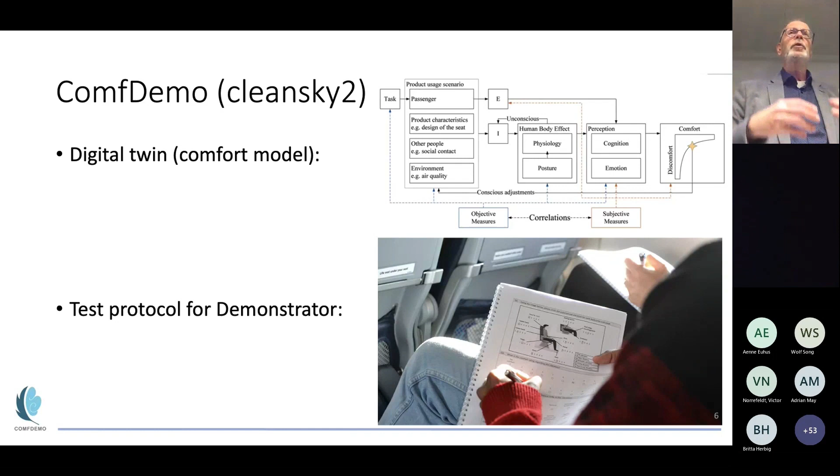Now I continue with the results we've shown in the literature and that we measured ourselves. My presentation is on aircraft interior priorities based on passengers' opinions. In this case, it's really based on what passengers say themselves, not what we measured—later presentations cover studies on what we measured. This ComfDemo project had two important parts: making a digital twin of human comfort, and the test protocol for a demonstrator. In Clean Sky, demonstrators will be made of future aircraft to test already what's happening in the future aircraft.

It's about passengers' opinion. In this case, we asked people to complete questionnaires in the aircraft while flying. If you look at a study in the literature by Bouwens on the most important factors for comfort in jet airplanes, you see that seat anthropometrics—how you fit in the seat—is the most important factor, and noise is number two.

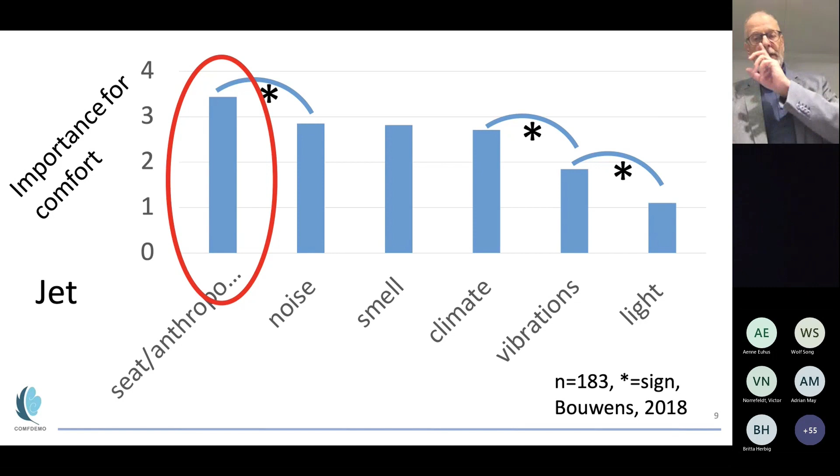Smell, climate, and vibrations after that. But we did also a real test in a turboprop flight on November the 3rd. It was a flight of 70 minutes, two times, with passengers.

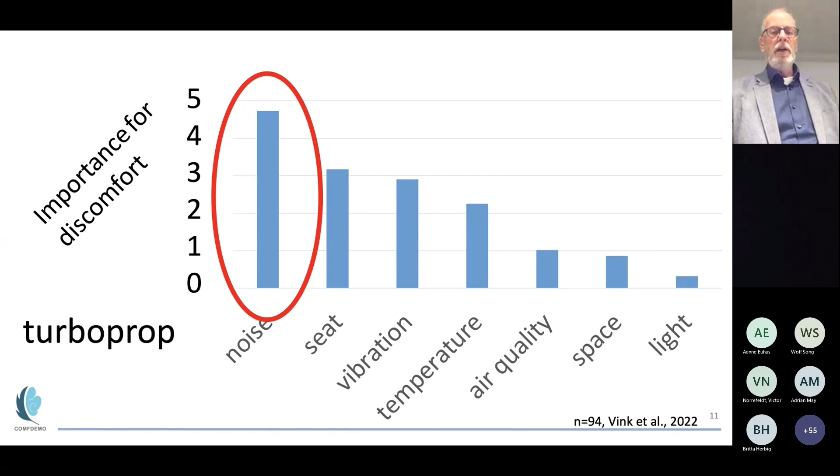So for future airplanes, it's important to take that noise into account and reduce it. I think it's important in the demonstrator to test how we can have turboprop aircraft with less noise.

If you look at the seat itself, what has priority in the seat? Nijholt did a large study where people sitting in an aircraft seat were asked. Number 1, which was mentioned, is legroom. I don't think that's a big surprise to you. Number 2 is the cushion, the hardness of the cushion. Number 3 is the lumbar support. Number 4 is the seat width.

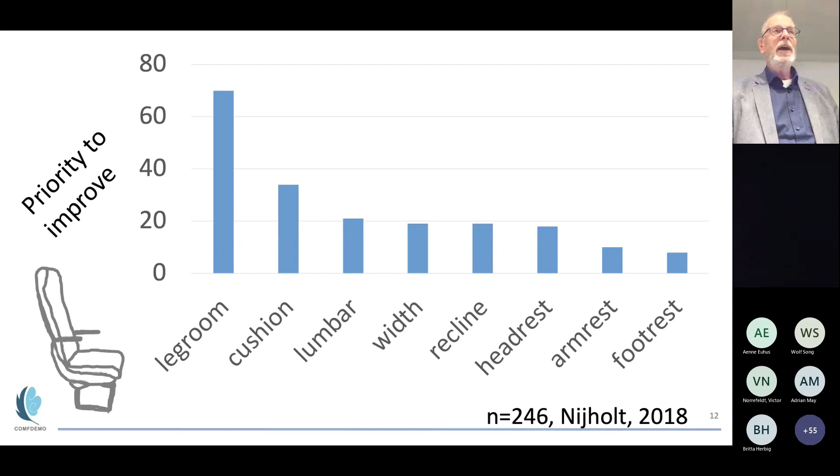Number 5 is recline. By the way, it's interesting that many people like the recline, but the persons sitting behind them don't like it. And then you have the headrest, the armrest, and the footrest.

There's also a nice study done by Anjani, and she compared changing the seat pitch, so seats a little wider apart, with changing the width, so a wider seat. What is the effect on comfort?

Many studies show hip width is influencing the seat width. But if you have an 18-inch wide seat, which you see on top of the slide, and you compare that with the hip breadth, well at 95%, the P95, they all fit in there. But if you look at the shoulder width, the males don't fit in there. And if you look at the elbow width, the P95 female and P95 male don't fit in there as well. So maybe it's more important to look at the elbow width if you want to create comfort than at the hip breadth.

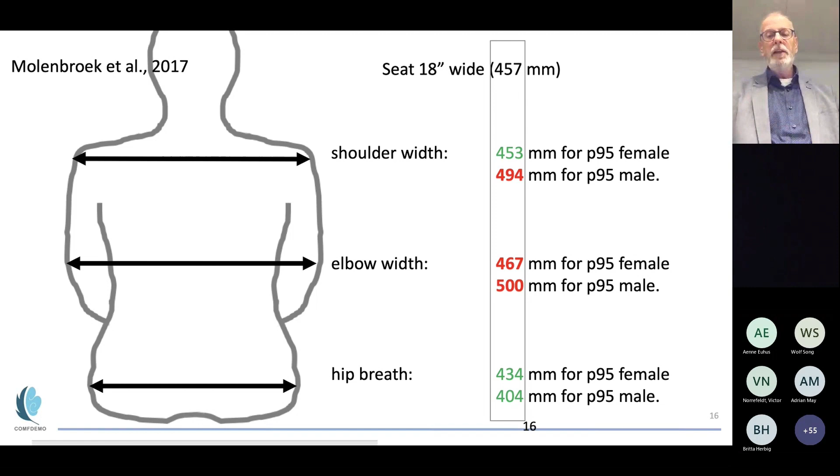So in summary, I shared with you that propeller aircraft have potential. That was already mentioned by Victor. They are more sustainable because they have less fuel consumption and so less CO2 they produce.

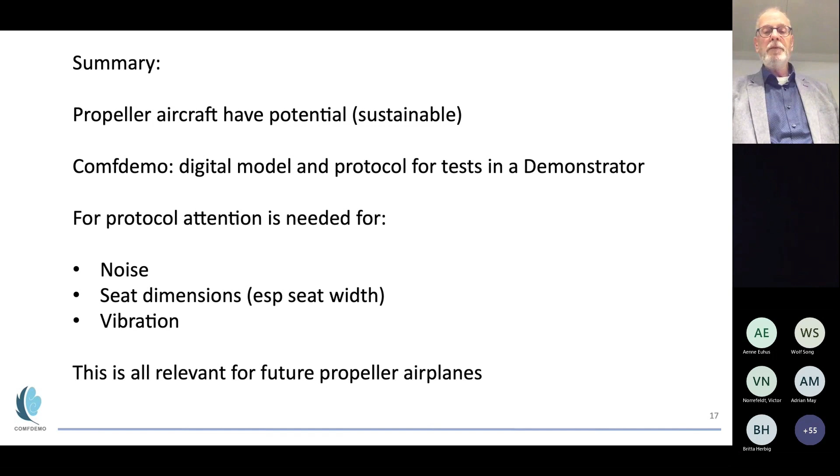And in ComfDemo, we make a digital model and a protocol for the test. And for the protocol, attention is needed for noise, seat dimensions, and vibration. This is relevant for future propeller airplanes.

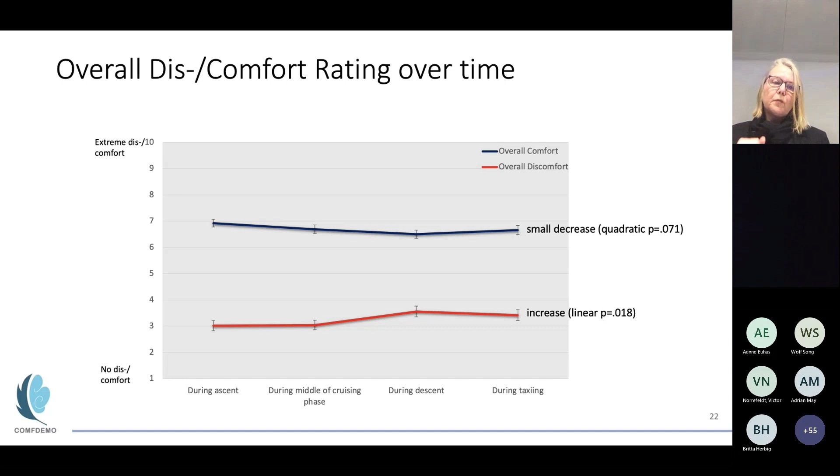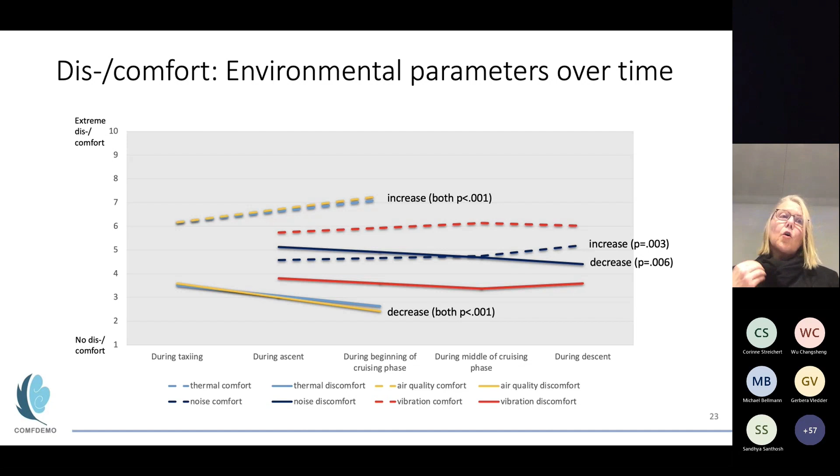In more detail, if you look at different environmental parameters, the ratings are really on the average, as for comfort as well as for discomfort. Participants have a decreasing noise discomfort rating over time and an increasing comfort rating over time, but it's still rather in the middle.

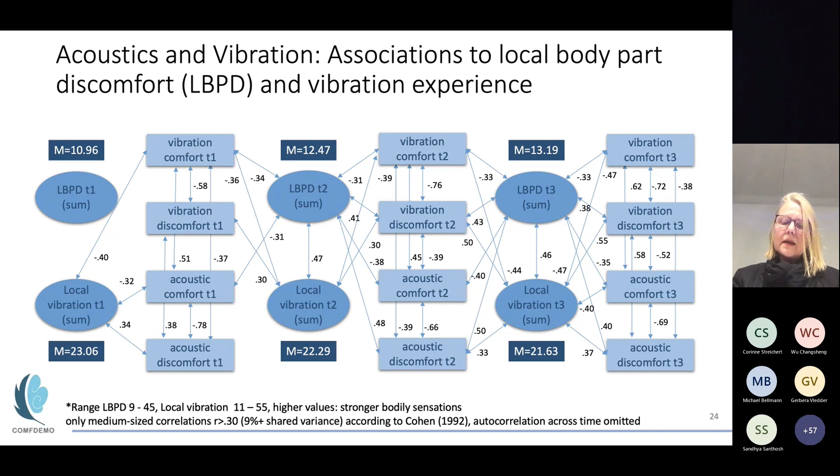This is going to influence the vibration comfort and discomfort, and the acoustic comfort and discomfort. Over time the associations are getting stronger, and this is even cumulative to the last measurement during descent. What's interesting is that we see this on a very low level. People didn't experience much local body part discomfort or local vibration, but it still has a rather increasing and cumulative effect on the comfort and vibration situation.

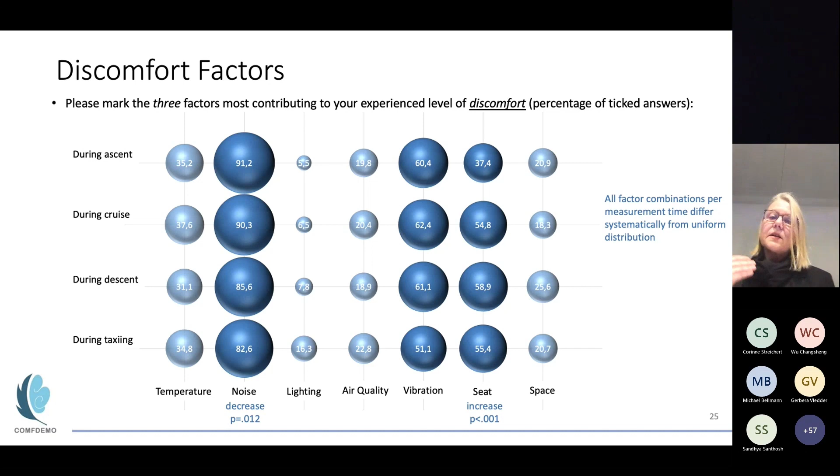This was already shown by Peter. These are the important factors people had to report over time: noise, vibration, and seat are the most important across all measurement times. Noise decreases in importance for discomfort, whereas seat increases as an important factor for discomfort.

If we do a cluster analysis, we see three clusters of important factors for discomfort. One cluster says noise, vibration, and seat are the most important thing. The second biggest cluster is temperature and noise as the most important thing, and temperature and seat is a smaller cluster.

What's interesting is that people with higher experience in flying, regardless of turboprop or jet aircraft, report more of the second cluster - noise, vibration, and seat as discomfort - than people with temperature and noise as a cluster. So there is an experience factor, and also a noise sensitivity factor: people in the temperature and noise cluster are less sensitive than those in the noise, vibration, and seat cluster.

Last result, which I think is rather important: we asked at the very end of the flight, would you fly again with a turboprop? 80 people said yes - a very high number of people - but we have 11 who said no.

These differ systematically across several things. The most important you can see here is the acoustic environment, but even more so and more reliably, it's the vibration they experienced during the flight. That's much higher for the people who say they won't fly again with this aircraft type, and they report a lot more local vibration on their body. So we have this vibration part as important. All other aspects didn't play a role in the decision to fly again.

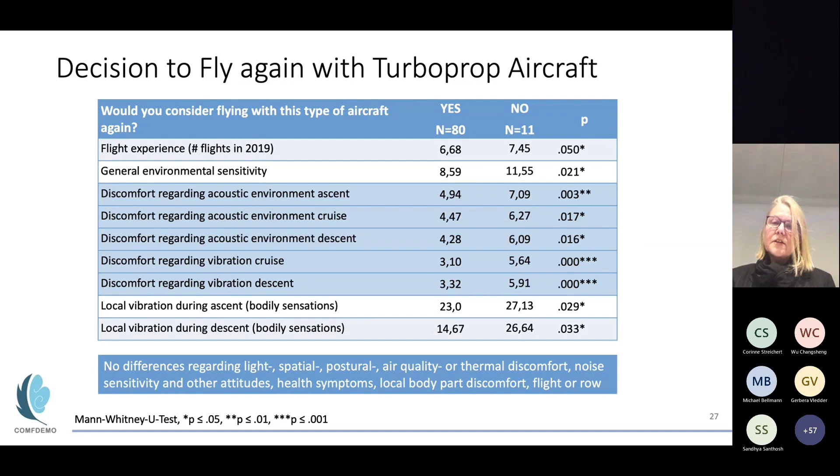To sum up, most people felt rather comfortable, the data are really good, and a lot of people would fly again. Noise, vibration, and seat are the most dominant discomfort factors. They are also the ones discriminating between participants who would fly again with turboprop and who would not. The development of comfort and discomfort experience over bodily sensation seems to be rather complex, and that is definitely a problem and a challenge for the modeling we will do in ComfDemo, and did already in ComfDemo. My colleague is going to tell you more about that.

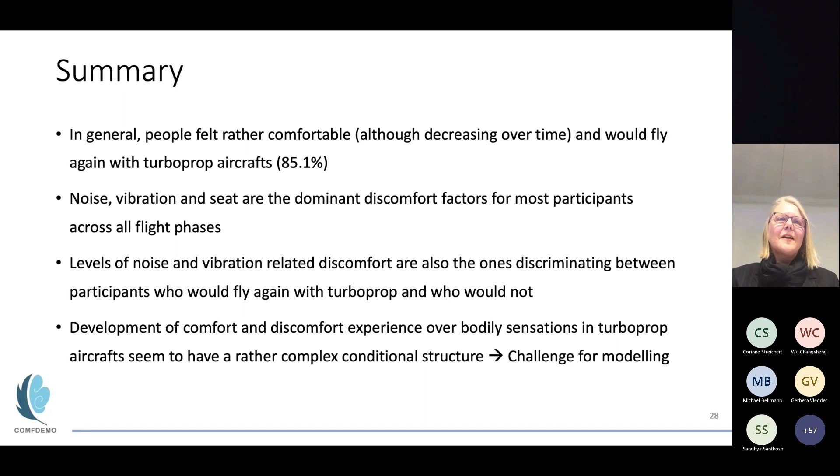Hello everyone, my name is Wolf Song, and I will give a short presentation on the digital twin of comfort. That's our first attempt at modeling passengers' comfort experience.

Just before me, two professors talked about subjective views of passengers towards different factors of comfort, and the construct of comfort is rather complicated. Like Professor Neil Mansfield said, a product itself can never be comfortable - actually the user decides if it's comfortable or leads to discomfort by using the product, even over time. That means comfort is personal, depending on our background, and comfort is multifactorial. Not necessarily one factor alone determines extreme comfort.

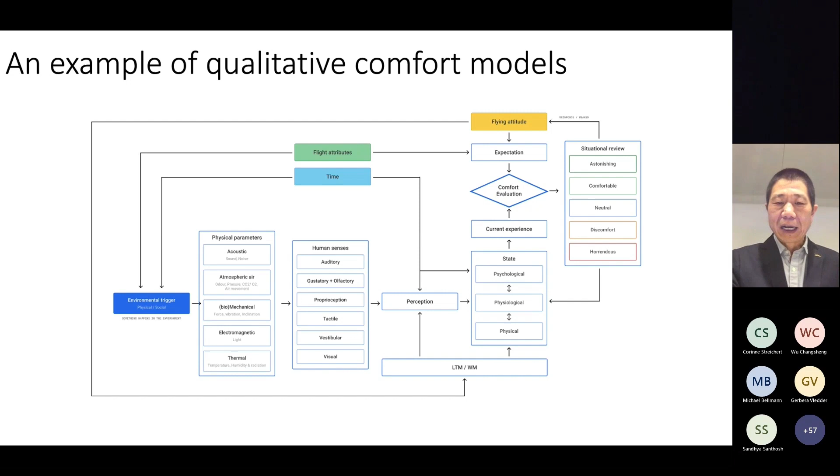So to try to model comfort, we try to identify different factors. Here I show you our exploration of different factors - not necessarily going into all the details due to time limitations. I'll quickly summarize those factors as local environmental factors, for instance noise in the cabin.

Micro environment, for instance, who I sit close to, and product characteristics and interaction between human and product. And the human himself, is he a positive person or negative person, and his flying experience. And most important, in between I put a clock, and how about comfort over time? Can we make a model and link these objective factors towards humans' subjective feeling? That's what I want to explore in these 10 minutes.

We try to highlight measurable factors, approximately 32 of them. I categorize them as time, local environment, micro environment, human, and product. We see details: noise, CO2 level, humidity, temperature, light intensity, flying time, and which row you are sitting, which seat, window seat or aisle seat, or the flight schedule time, whether morning is more pleasant or afternoon is more pleasant.

Regarding human factors, we see humans have a little bit of static factors regarding a flight, for instance gender, age - you can't change your age within a flight - and the stature, how high you are, body mass, popliteal height, buttock-popliteal depth, and hip width. Also, in between, I put a small cartoon, and we try to record humans' left-right shoulder movement and left-right waist movement. We see if we can record these 32 parameters and make correlations with the subjective feeling.

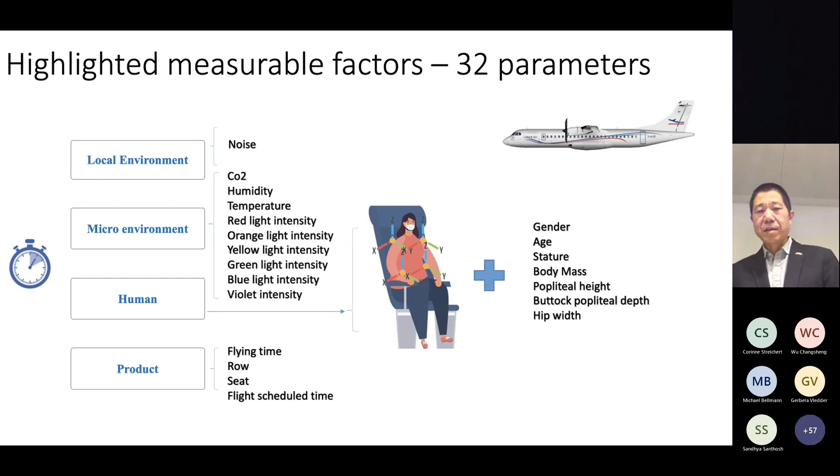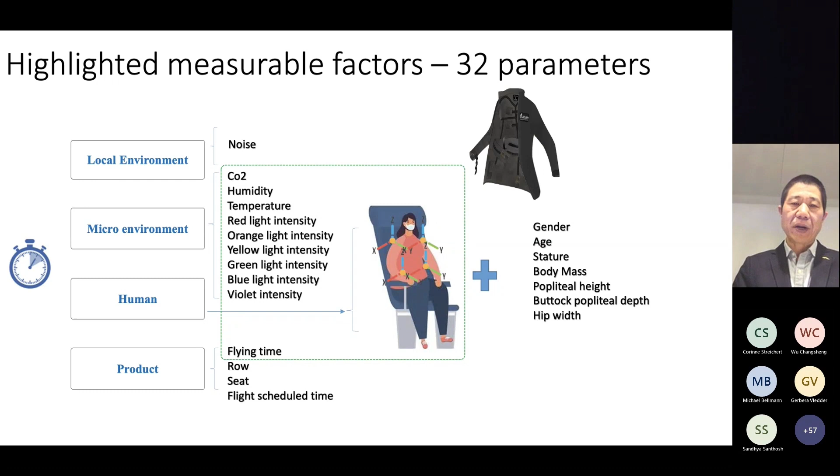For this, we developed a measurement tool named Jacket. It's able to record the parameters now shown on screen within the green rectangle. In detail, this Jacket is a comfortable wearable. Inside, we put embedded systems which are able to record the parameters we just measured - different movements, CO2, light, temperature, and humidity. On the left side, one of my PhD students is wearing one of these jackets.

In total, we produced 20 of these jackets. For this, we also selected a representative population. The mean age of these 40 people - we have 2 flights, morning 20, afternoon 20 - the mean age is approximately 35, a little bit young. The stature average is 174.

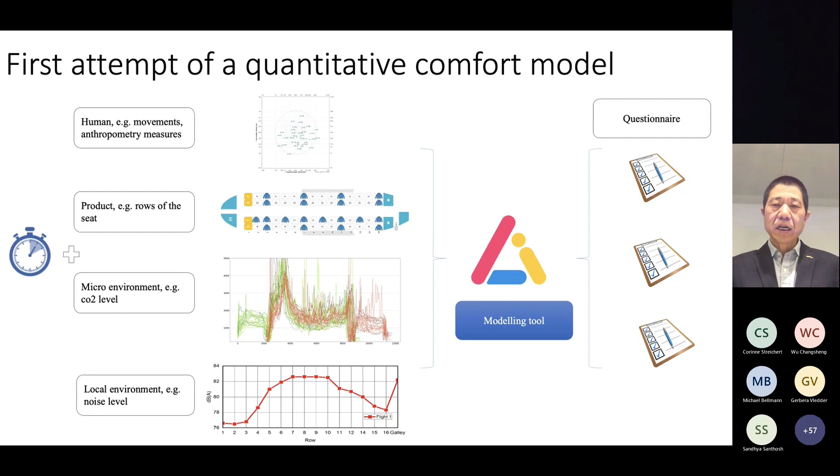On the right is the questionnaire, the answers of users' subjective feeling, and we are trying different modeling tools to link the objective data with the questionnaires. In our modeling, we take some hypotheses and we pre-processed our data. Here I just report our first attempt: we try to model the changes of comfort and discomfort as the baseline differs per person.

For instance, if I'm a negative guy, I always say comfort is 0, discomfort is 10 all the time. And maybe a positive lady will say comfort is always 8, 9, and discomfort is always 2 or 3. At this moment, we try to suppress this effect by modeling changes of comfort and discomfort.

We took 60 seconds as the basic time unit, and we also augment or increase the amount of our data a little bit by linearly interpolating the comfort discomfort scores during this 70 minute flight, because we can't ask users to report every minute of their comfort and discomfort scores.

Finally, it's data processing. We normalize all the data between 0 and 1, minimum is 0 and maximum is 1, to make the average weight of different parameters equal.

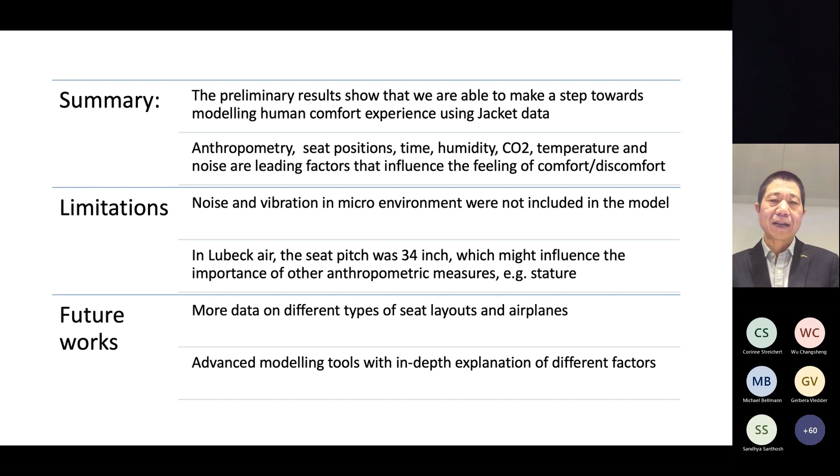In the future we will try to collect more data on different types of seat layouts and airplanes, and try to use different modeling tools with in-depth explanation of different factors. So thank you very much.

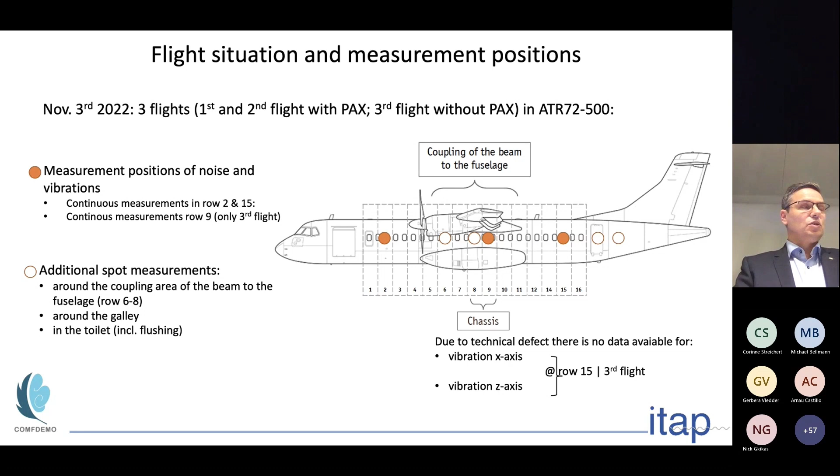And we have the possibility during the 3rd flight to make some additional spot measurements regarding noise and vibration, not only for sitting passengers, but also for flight attendants in the galley and toilet, and so on. So we do not have data from only one sensor, everything was fine and well recorded. I just want to say thanks to Lübeck Air, who supported us by undertaking this experiment.

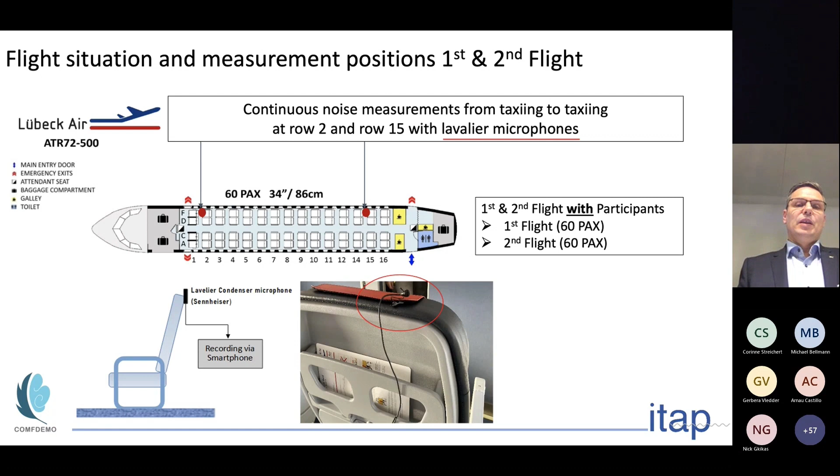So for the first 2 flights, we measured continuously from taxiing to taxiing with microphones in a sitting position at seat row number 2 and 15. We have 60 passengers included in both flights, and you could see here, it is at the height of a sitting person.

For the 3rd flight, we were also able to add more measurements, but there was a restriction. It was due to safety that additional measurements were not allowed in the first 2 flights. That's the reason why we have this flight without passengers.

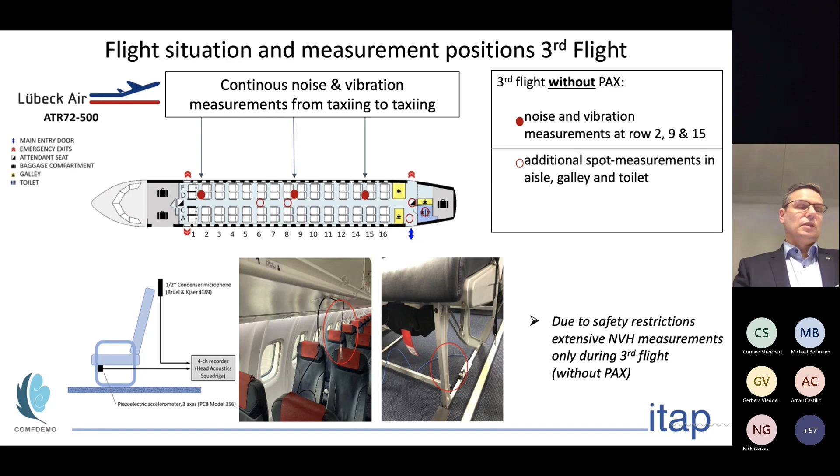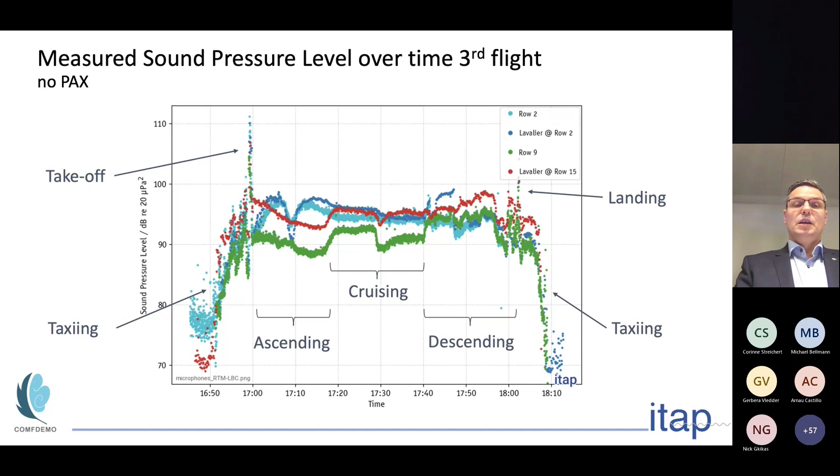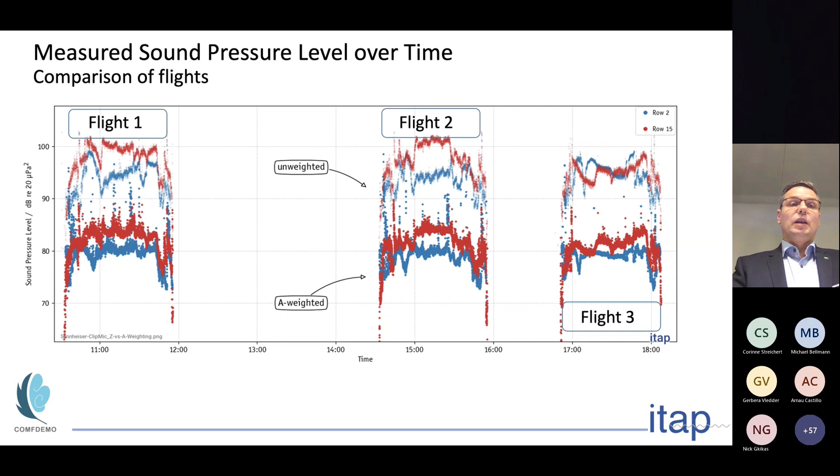You could also see that for the third flight, where we do not have any passengers inside, the temporal shape of these recordings is significantly different for the unweighted SPL, but for the A-weighted SPL it's very comparable. So what we found is that for the unweighted SPL, we found similar levels in the first flight with passengers, and during cruising we see higher levels for row number 15, which is in the back, compared to row number 2.

And we see that in flight number 3, we have similar SPL in row number 2 and 15, so it might be that the influencing factor is whether passengers are inside or not. For the A-weighted sound pressure level, we identified slightly reduced level differences between row number 2 and 15, in the back and the front, and we also see that row number 15 had lower levels during the third flight.

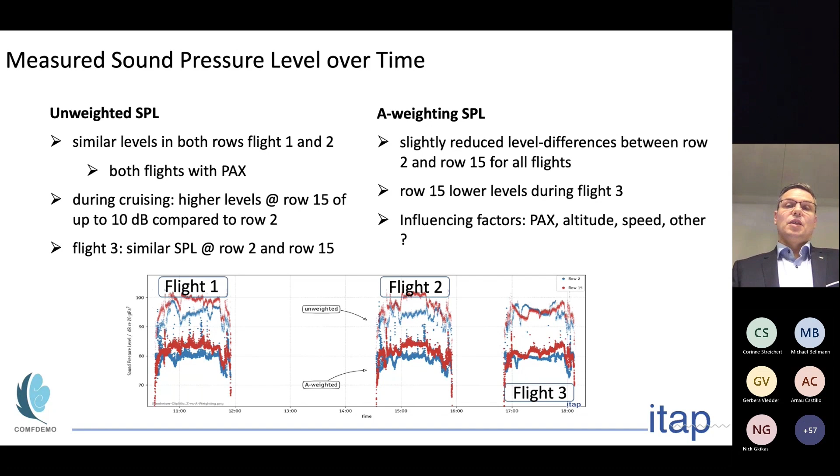So the question is now, what are the influencing factors on noise? Are these the passengers, or altitude, or speed, or something else? That's the reason why we plotted our measurement data from the third flight at different locations, compared to the altitude and the speed. And you could clearly see that there is a high correlation between the noise level measured at different positions in the cabin with the speed as well as with the altitude.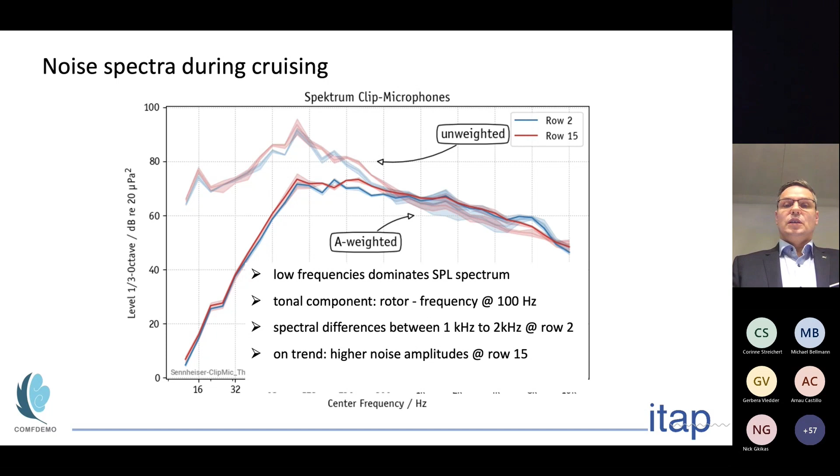We also make some spot measurements in row number 6 and 8 for walking persons, so for flight attendants, and you could clearly see that we have differences in the unweighted sound pressure level if we are going from the front to the back, as well going to the galley. The galley was extremely silent compared to other galleys we measured in previous projects.

And if you are going to the toilet, you could be a little bit feared, because if you close the door or if you press the flush button, it comes a lot of noise to you. So you don't have to be scared for that.

And you could see if you are very close to the rotor blades, you see the dominant frequency, rotor blade frequency at around 100 Hertz. You also see what happened on the perceptual side, if you compare the SPL and the A-weighted SPL. A lot of things happened in the frequency range between 1 kilohertz and 2 kilohertz, where speech is taking place.

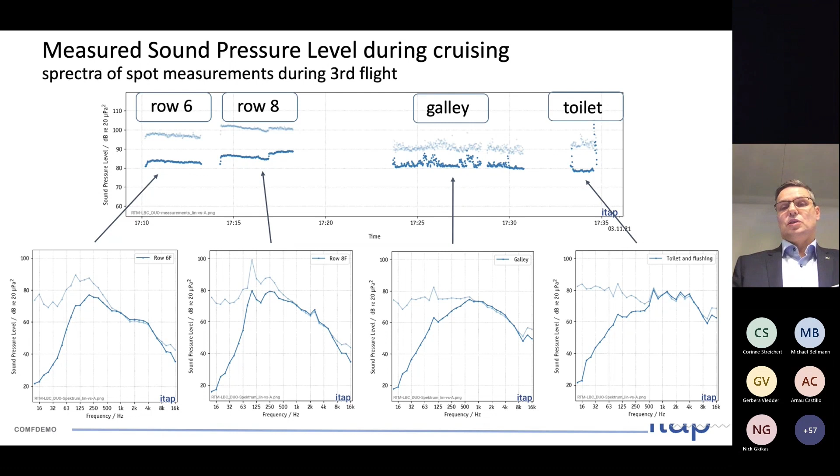We also make measurements of the vibrations only for the third flight. You could also see that we are starting from taxiing to taxiing. We also see that we have differences if you are measuring in the middle or in the back of the cabin, and for sure if you are measuring in different directions.

What we also see is that for sure the dominant frequency component is 100 Hertz, but we also observe that we have a lot of energy in frequencies between 100 Hertz and 500 Hertz. So we measured the vibration up to 1 kilohertz.

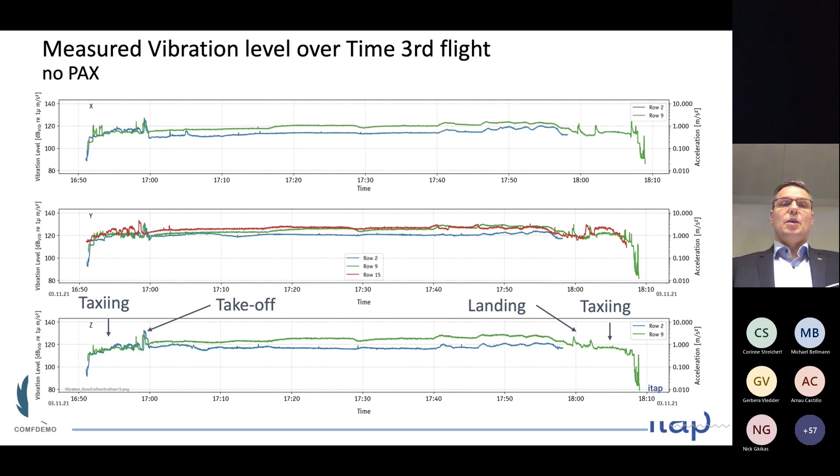So there is a strong indicator that if you want to have an objective description of the subjective perception of vibration, you have to enhance the ISO standard to higher frequencies, because a lot of things happen between 100 Hertz and 300 Hertz. So I come to the end of my talk.

We presented continuous noise and vibration measurements during 3 flights with and without PAX in an ATR 72-500. The noise and vibration significantly depend on a flight phase, which is not surprising, between taxiing, takeoff, and so on, in level but also in spectrum, which is highly correlated to the altitude as well as the flight speed. Noise and vibration significantly depend on the location where you're sitting or standing or working, especially for the cruising condition.

What we also observed is that the sound pressure level is dominated by the rotor frequency and by very low frequencies, but a lot of things also happen when you're looking to the A-weighted sound pressure level in the frequency range where speech takes place.

For an objective description of the subjective perception of noise and vibration, we definitely need psychoacoustic metrics, and we are working on this. And for sure, there is a hint that noise, maybe also vibration, might also depend on the amount of PAX, so how many PAX are inside the cabin.

So for the outlook, we now have vibroacoustic recordings which we could reproduce in a cabin simulator and could change one of these 2 metrics. We are currently also working on future psychoacoustic analysis, and what we want is an objective description of the subjective comfort and discomfort perception. Thank you very much.

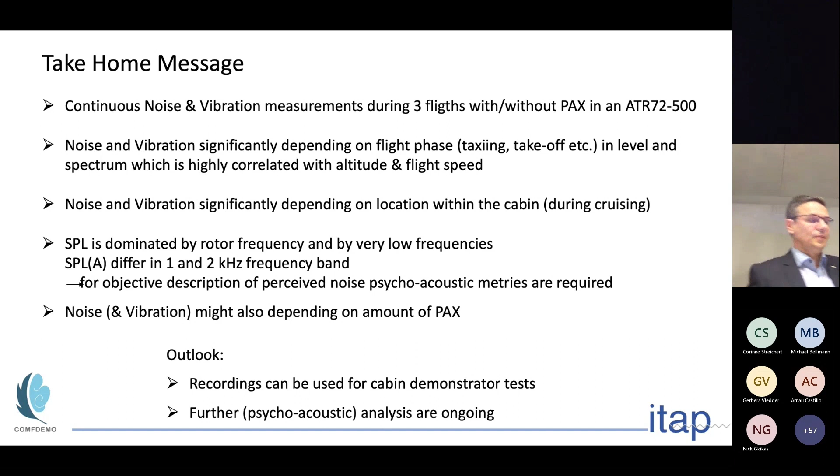Okay, so I'm Neil Mansfield, and I'm going to be presenting to you some studies that we've done at Nottingham Trent as part of the project, and some of this is laboratory work that we have been carrying out.

What I'm going to talk to you about over the next 10 minutes is our goal of understanding how passengers integrate comfort and discomfort factors into their overall experience, and the 3 approaches that we had to this. To begin with, we wanted to complete a voice of the customer survey.

And then COVID hit us, so we had to do it in a different type of way. What we did as the way that we elicited our data was we ran some focus groups with different participants of different ages. We were trying to understand the opinions of aircraft, different types of aircraft, and their experiences. We then take that data, transcribe it, and we can do some analysis on what people said in those studies.

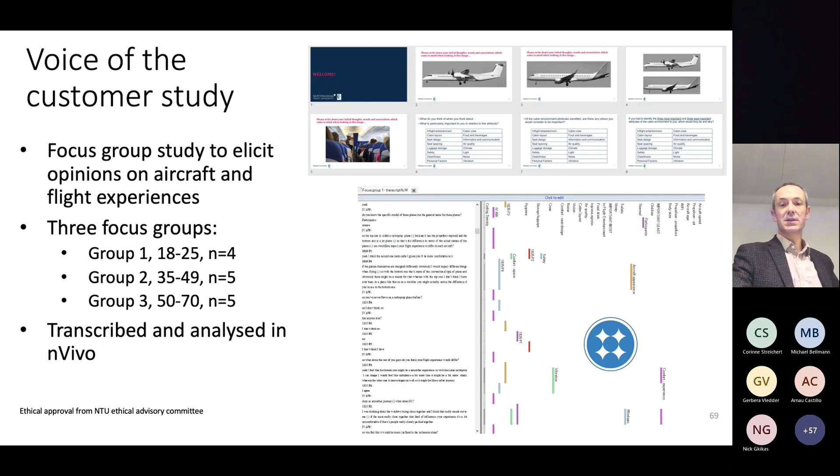To summarize, what we found was the topics people spoke about changed a little bit between groups, but the most important areas we discussed, the things in our control as aircraft designers or operators, are: people like to talk about space, noise and air quality. They talked about vibration, and particularly older groups talked about the thermal environment.

There are other things that were discussed, but perhaps outside the scope of our focus here - for example hygiene, since this was in the middle of COVID, and perhaps entertainment, areas outside the fundamental design. So this has confirmed what was in the literature before, but this time focusing it on turboprop and jet aircraft, that we were still in the right area.

So then the question is, what happens when people are exposed to these multiple stresses of noise, vibration and thermal? There are three ways we could see an interaction. The first would be an additive interaction, where if you have two stresses, you have one, you have a second, and you add them together to give you your overall combined impact.

Maybe we'd have a cross-modal effect. For example, if someone is exposed to high noise and high vibration together, maybe they'll be more critical of the vibration. So if we took the noise away, the sensitivity to the vibration would change. That's a cross-modal effect.

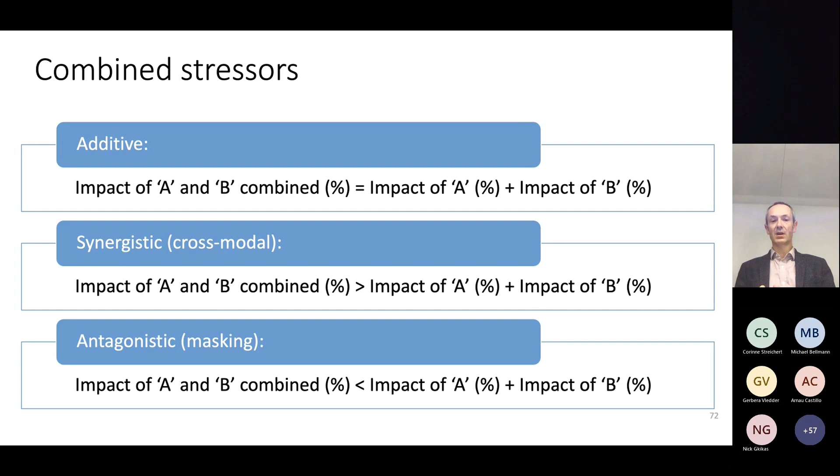The third one is kind of the opposite, which is a masking effect, where you have two stimuli and one of them actually reduces your sensation to the other one. All three of these - there's literature to support that.

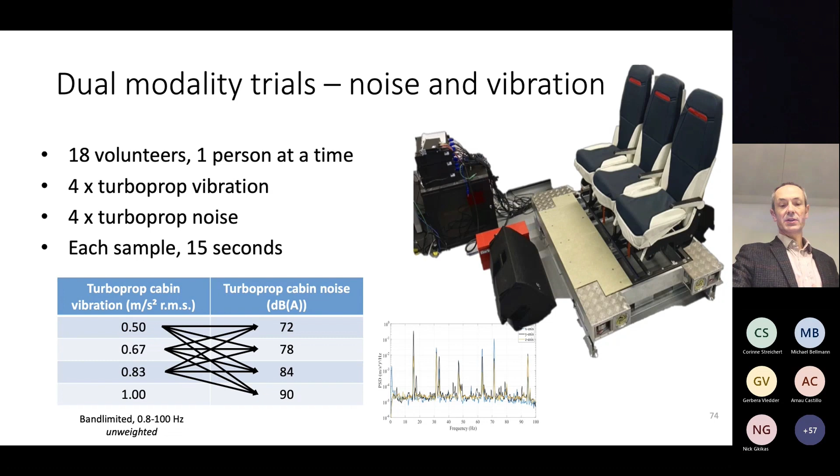These were short samples - we had turboprop noise and turboprop vibration, synthesized, each about 15 seconds. We had every combination of vibration and noise that you can see in the table here, meaning every level of vibration tested against every level of noise and vice versa. You can see all of these were tested.

We then asked the participants how they feel about these, and they would give scores of the noise, scores of the vibration, and then an overall score. This is a method we've developed over several years to get good quality data collection.

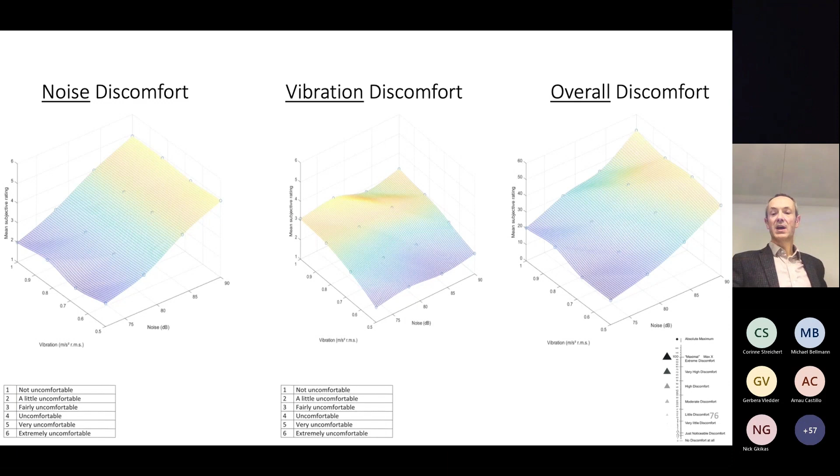So this was really useful information for us in developing our model. But overall, we can see there's an additive type of effect on the right-hand side. The highest point on this surface is the furthest away point, corresponding to the highest vibration and highest noise at the same time. The lowest position is the lowest vibration and lowest noise. So this shows that both factors are important to make conclusions about overall discomfort.

If we sort of linearize these surfaces, then you can see how they work with these squares.

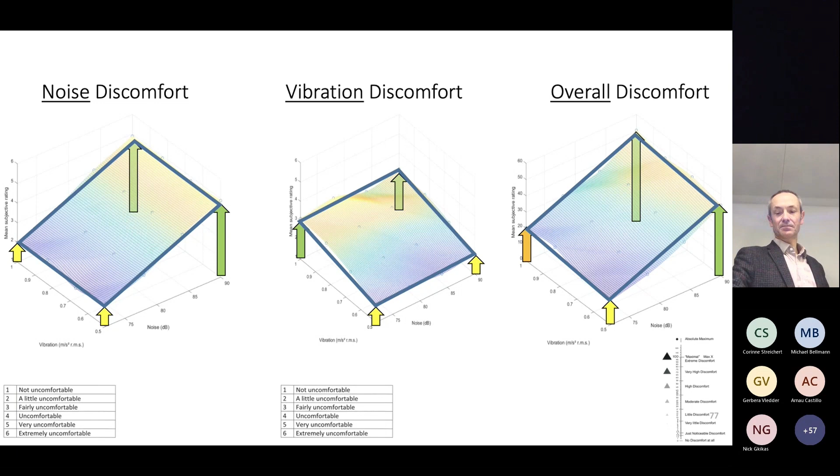So then we moved on to our trimodal trials, and here we went into our environmental chamber where we can change the temperature, the humidity, and the oxygen level. In this case, we were only controlling the temperature. We had a similar type of protocol with the noise and vibration, seeing every combination of each of those, but we ramped the temperature, so the temperature went up during the trials.

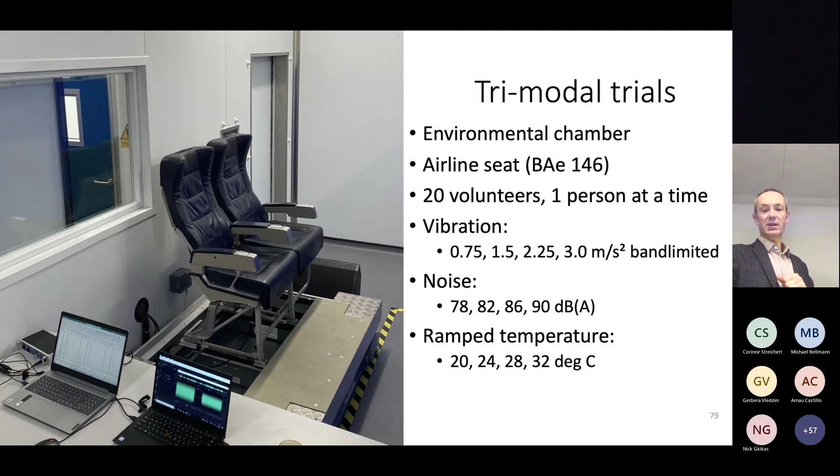In this case, we changed the scale slightly. The previous trial we thought we wanted to extend it, so the noise and the vibration, and this time we also had a thermal factor.

What was a unique part of this was we asked this question: in order to improve your comfort, would you prefer to reduce the noise, the vibration, to increase the temperature, or decrease the temperature? This was in some ways similar to the previous study. We used slightly different questions and a different range of noise and vibration, but overall we had a similar type of surface, so I won't go into this again.

However, what was really interesting for us in this case was what we saw about the preference. So if you remember, we had noise, vibration, and thermal. What we did was take the data and map it. In our analysis, we said that if more than 50% of people prefer to reduce the vibration, we'll say vibration is dominating. The same for reducing noise and the same for reducing temperature.

You'll remember we could also ask people if they wanted to increase the temperature, but in this case no one said that. That's a bit of a flag here - this is not saying in the conclusions that the lower the temperature, the better. In this range, we already had a comfortable temperature at our lowest temperature.

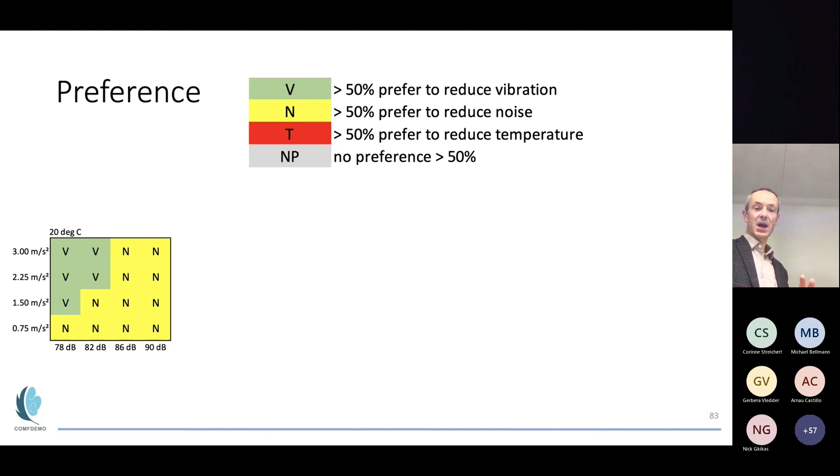So at 20 degrees, you can see that depending on the noise and vibration, there is a map here. If you have a low noise level but high vibration, people would like to reduce the vibration. The same story for noise - if you have a high noise level, people would rather reduce the noise. You can see that in this case, noise is dominant in most cases. However, for lower noise levels, the vibration can also be really important.

The second element of this is that as we move up to 24 degrees, we have the second element here. At the lowest noise and vibration, we say NP, meaning no preference - none of the factors were above 50%. This shows there is a range where there isn't much difference between the noise and the vibration. People are kind of in a sweet spot at that point. But you see a similar mapping to what we saw before.

As we move up the temperatures again, you can now see if there's low noise, low vibration, but we're up at 28 degrees, the temperature starts to become important. And then, no surprises, but at 32 degrees, the temperature is dominant for the majority of the cases here.

So what this allows us to do is make some conclusions: if the noise level is above 86, then most of the time the noise is going to dominate over the vibration. But if we reduce the noise below that level, then the vibration becomes important as well. Similarly, if the temperature comes up, that will dominate the response of our participants.

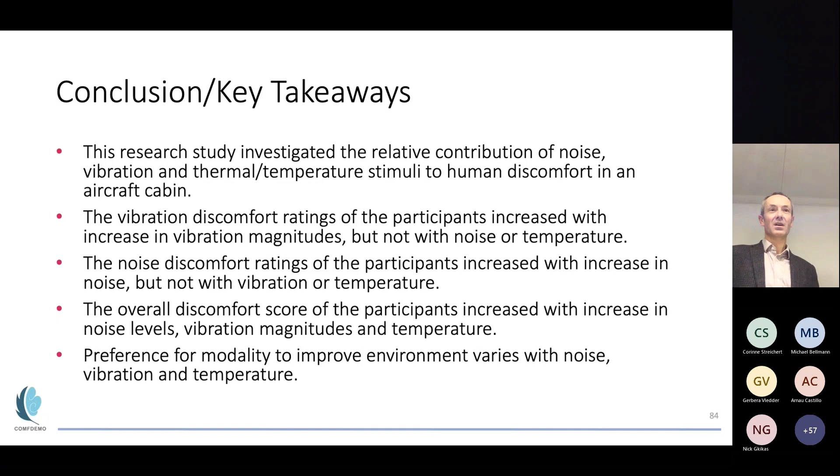Hi, I'm Gerbera. I will shortly tell you something about a small research we did parallel to the bigger ComfDemo research, or maybe actually following the bigger ComfDemo research.

This was about the impact of noise cancelling headphones on passenger comfort in turboprop aircraft. At one point we thought, okay, noise is a problem in turboprops, so what can we do about this? Actually, during the bigger ComfDemo test, one of the participants took out their noise cancellation headphones themselves and started using them. Afterwards, I asked this person why they took out the headphones, and the answer was something like, the noise was just very loud, so why wouldn't I?

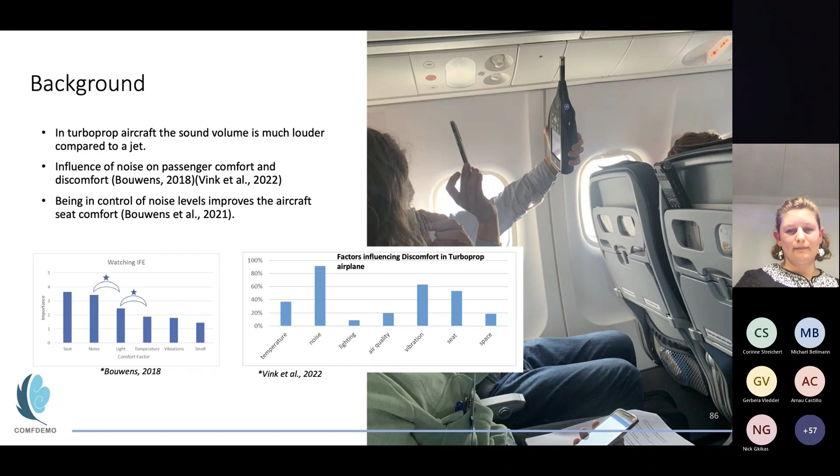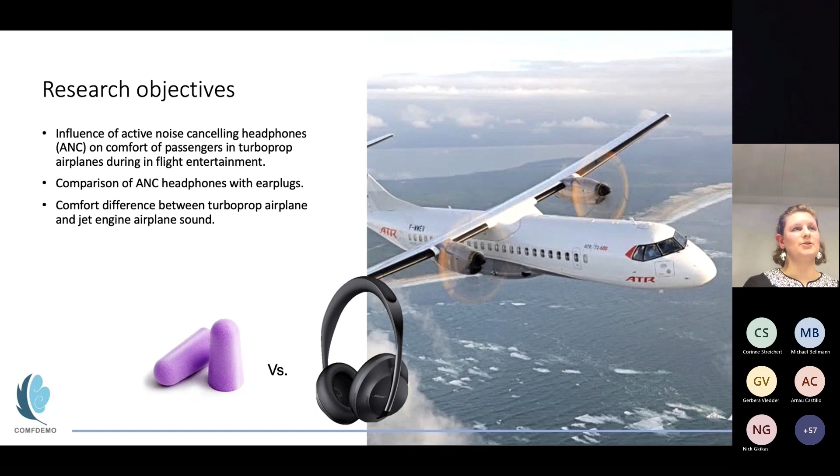So following this, we thought, let's just test this and do something with it. We know noise has quite an impact on the comfort and discomfort experience, and we also know that being in control of noise levels will already improve aircraft seat comfort. So within this small test, we looked at the influence of noise cancellation headphones on the comfort of passengers, and we did a comparison of noise cancellation headphones and earplugs, and between turboprop sound and jet sound.

Within this study, we included 24 participants between the ages of 18 and 39, with a 50-50 male-female group. We asked them to do a relaxing activity, preferably without adding another sound source, but they were allowed to talk with each other. We tested in groups of 4, each participant going through 4 conditions for 45 minutes. We did this in an airplane fuselage on campus in Delft, where we used a sound source from behind, simulating the aircraft sound experience.

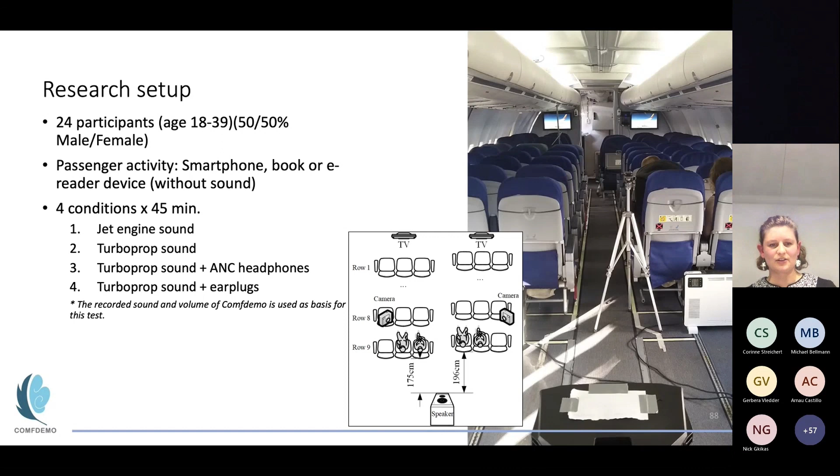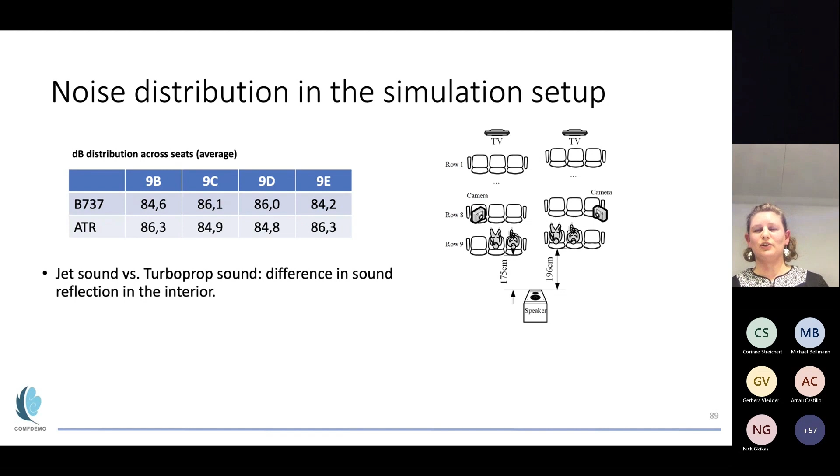One of the things we started out thinking was that this would be a fairly easy test to do, but we found out that setting up the sound distribution was quite hard. When we played the jet engine sound, the noise distribution across the seats was quite different compared to the turboprop sound. This led us to exclude the outer seats, because the turboprop sound reflected a lot against the walls, and there was no good noise distribution possible to keep the test as consistent as possible. This might sound quite logical, but it does show that if you are using different sound sources in aircraft design, you might also want to look into the acoustic material properties of the different aircraft.

Looking at the overall preference, it's quite what we expected: it clearly shows that noise cancellation headphones were preferred over earplugs, and that jet engine sound was preferred over turboprop. This was also represented in the comfort and discomfort score, where the headphones clearly scored higher on comfort and lower on discomfort.

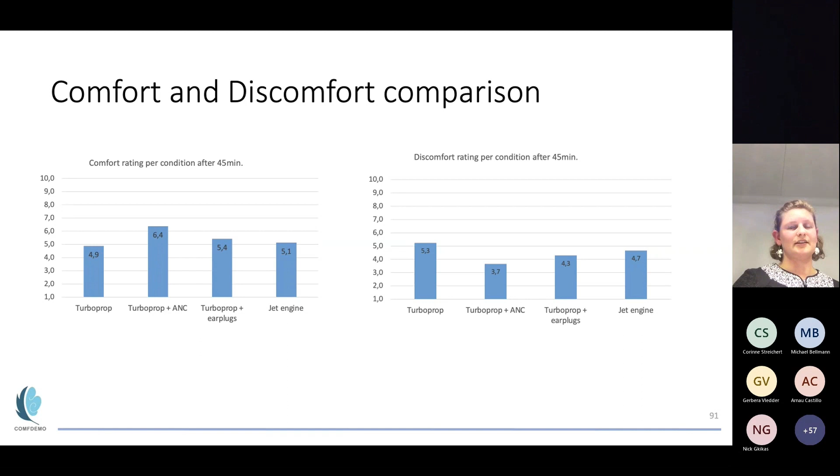Comparing them further, looking at blocking out noise performance, active noise cancellation headphones performed a lot better. But the earplugs are a lot less heavy on the head, and they are quite easy to implement. The active noise cancellation headphones, of course, have the option of including music, and we found out they create a feeling of privacy, which is a nice extra. But there is also a feeling of air pressure change, and some participants experienced a heightened awareness of vibrations and heartbeat, which they found very uncomfortable. This led some of them to say they don't want anything on their head, but if they have to choose, they would choose earplugs over headphones.

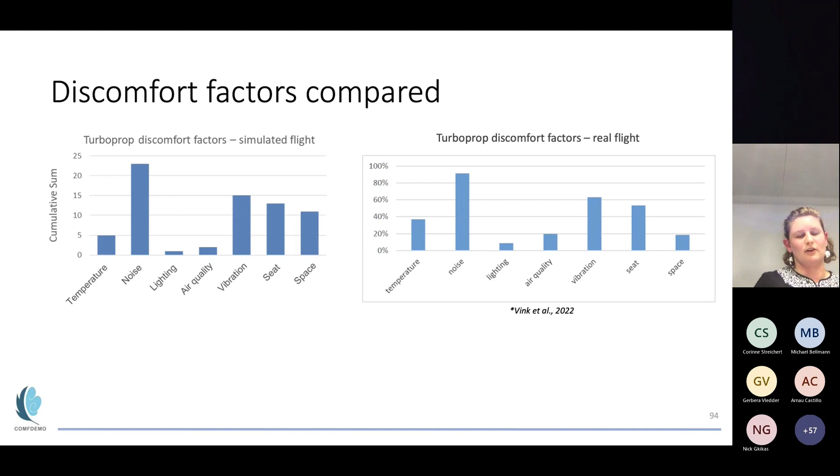So what are the main key takeaways? Active noise cancelling headphones are preferred over earplugs. Jet sound is preferred over turboprop sound. For a low-cost setup for acoustic comfort related studies, this kind of setup can be used. And in material choice for interior design, you might want to consider the acoustic qualities as well. So thank you, and now I would like to give the word back to you.

Okay, thank you. So a lot of what we've been doing in the project has been with the goal of producing a model.

And what we have done is we've created multiple models. Many of us have created different forms of models, based on the data that we've been able to obtain. So what I'm going to do is to cover some of the model details where we stand at the moment, but I have to say this isn't comprehensive, and it's not covering all of the models that have come out of the work so far and are still being worked on with the richness of the data that we have.

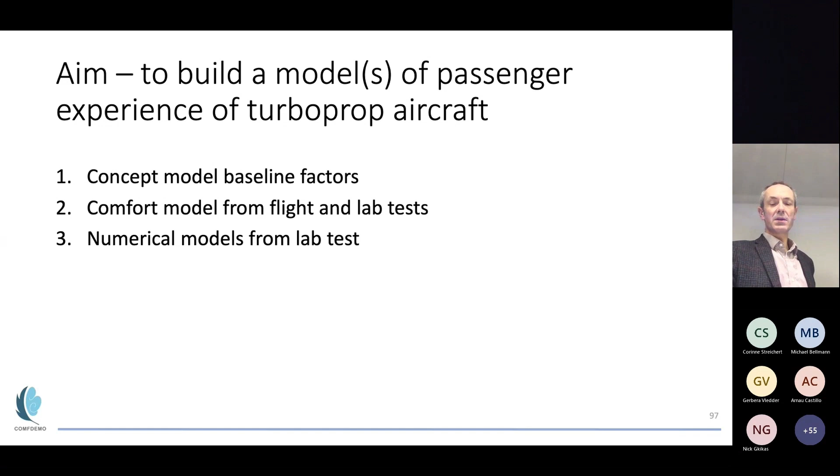So when we began the project, we pulled together multiple types of factors that could affect overall comfort and discomfort. So these ranged from, for example, the product properties and the environment that people find themselves in. Of course, these will interact.

Then these will affect the person's psychological state. There would also be an interaction with their physical characteristics, which has something to do with the demographics or their anthropometry. That then gives them their current experience, and that will influence their comfort and discomfort.

However, there could be triggers into other areas. And of course, some people are very experienced with flying. Some people are less experienced with flying. Some people, flying is part of work, is maybe mundane and everyday. Some people, flying is associated with going on holiday. So there are these other factors, the past experience is also very important.

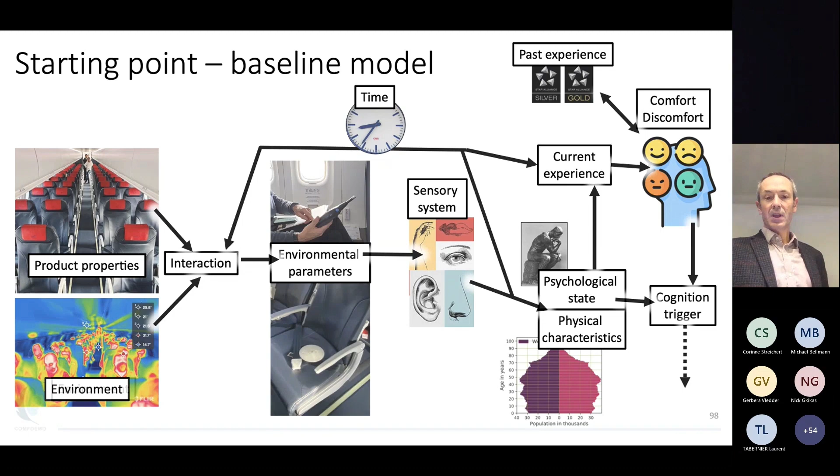So we kind of had this outline. And in fact, what we did with this is to turn it into, we strip out some of the images there, and we can turn it into this model where we kind of were at the beginning of the project. This was our starting point very early on, which included qualitative and quantitative factors.

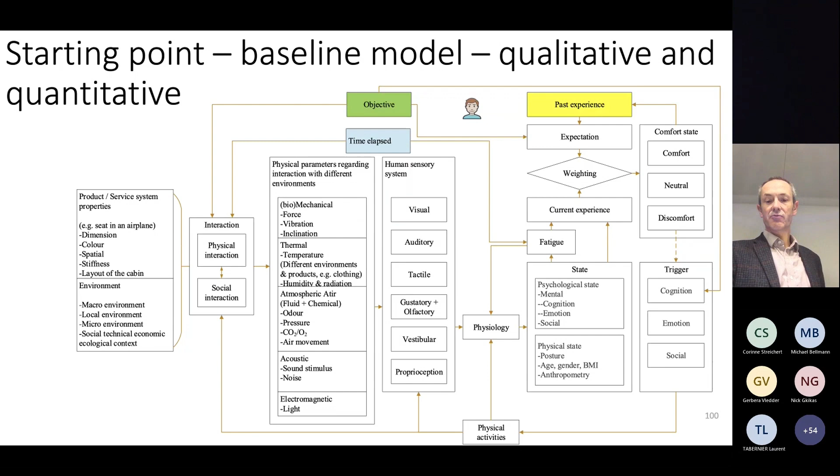So continuing through the research, we've done some flight tests. So this is some of the details from the flight tests that we did about a year ago. We've done some lab tests, and there have been some tests that have been conducted in some cabin simulators in Nottingham and in Delft. And obviously, part of this whole project is designed to provide models that can be used in a cabin simulator.

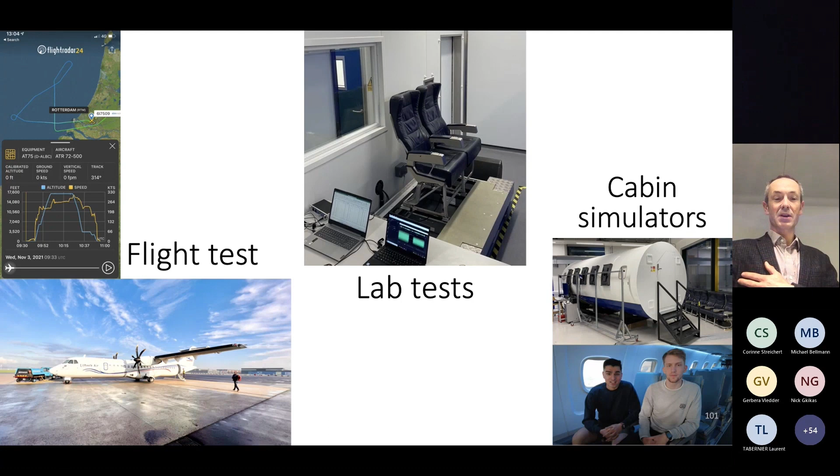So what I'm trying to do in this presentation is to draw together some of the findings that we've discovered as we've gone through each of these different types of tests.

So that's just so that you can see a bit of how this is going to work.

First of all, before people get onto the flight, they may have a negative mood, or they may have some positive past experience and a positive attitude. Through our flight tests, there was an association between the pre-boarding mood and the discomfort or comfort during the first phase of the flight, the ascent. So your mood beforehand affects how you feel at the beginning of the flight.

Another area we looked at with our initial model was the product properties. Some specifics where we found statistical links within the flight tests are: if the seat is easy to adjust, we have more comfort and less discomfort. The same for if there's a sense of space, and if there's restricted sitting, less comfort and more discomfort. That was for our flight tests, which was on an aircraft as it is.

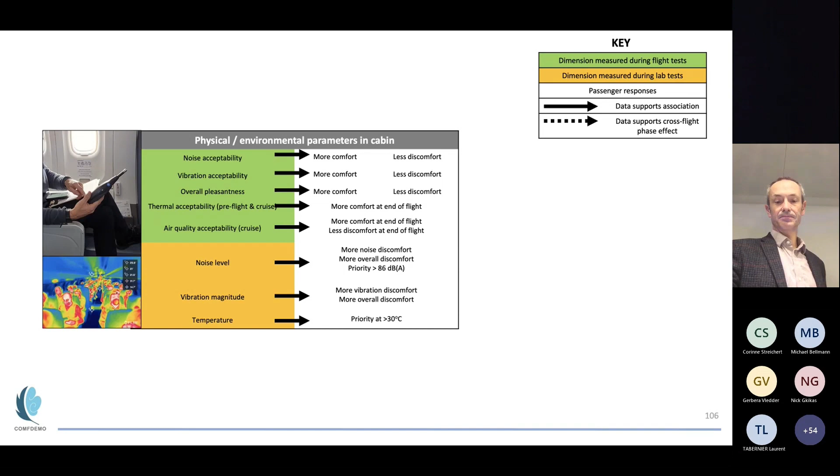So if we put all of these together, we have multiple factors we've looked at during the project, with our experimental work in the flights and in the laboratory, and we can come to some conclusions as to what links with other items. The things that aren't shown here didn't have such a strong relationship based on the tests we've done.

But we're not quite at the end yet, because what's really important to us, as people wanting to improve the environment of those who are flying, is: would you consider flying in this type of aircraft again?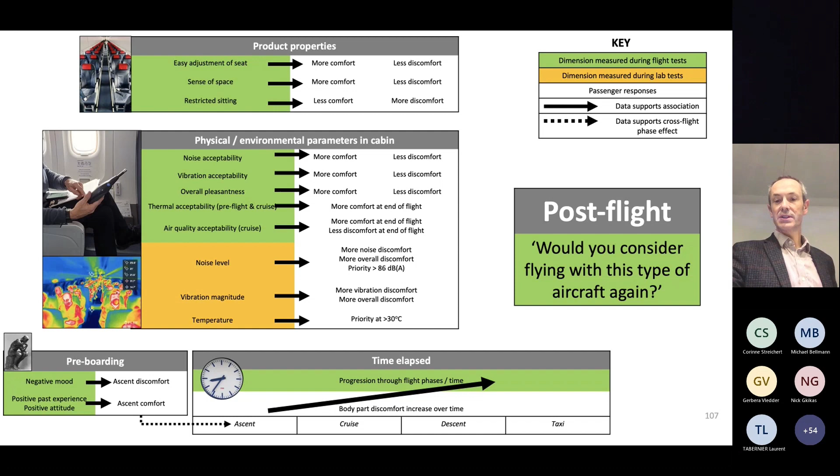What we found is that if we take the top dotted line here, the noise acceptability and vibration acceptability, overall comfort on the descent, and overall pleasantness are positive attributes adding to 'would you consider flying with this type of aircraft again.' There are also negative attributes: one being how many recent flights the person has had, so how experienced they are; the overall discomfort during the ascent and descent; and the overall discomfort during the taxi. Those are the negative attributes related to whether you'd consider flying with this type of aircraft again.

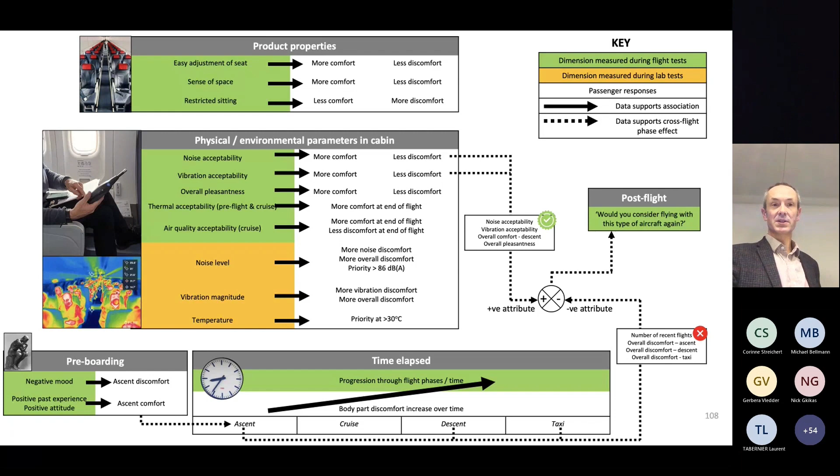The other type of modelling we've done, based on our laboratory tests, is modelling the overall discomfort and the individual modalities. At the top we have noise, at the bottom vibration; left is measured and right is modelled. This is a fairly straightforward curve fitting task to produce an initial model here.

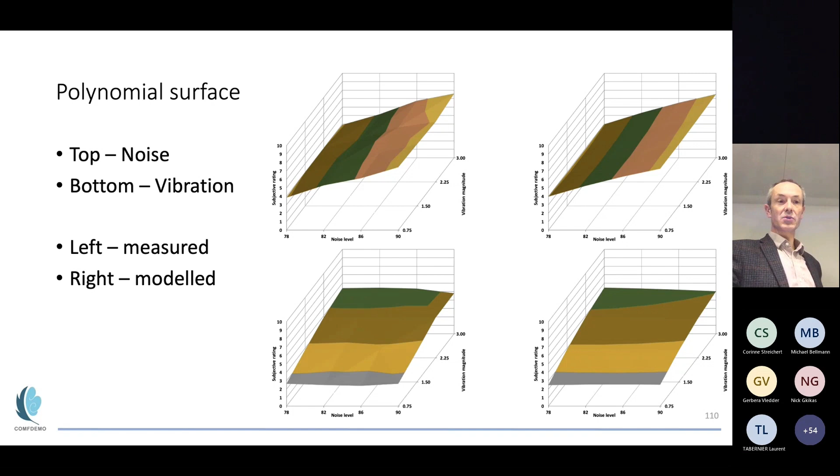But what we wanted to do was expand this using polynomial functions and multiple factors, which we did in MATLAB, and we then produced a model.

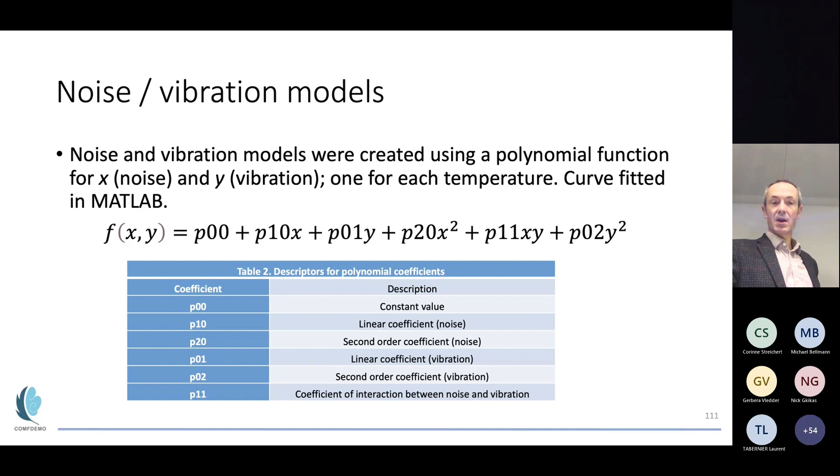What we have here is a screenshot from a model that actually runs in Excel. We can type in the number for noise and vibration, and it will give us a prediction of the relative score for noise and vibration ratings at different temperatures. This model gives us a score based on the scale I showed you in an earlier presentation.

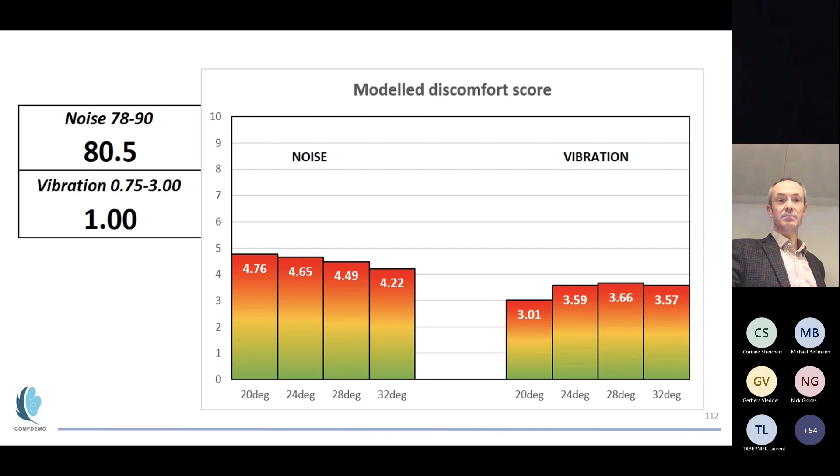For overall discomfort, we're using these surfaces that we saw before. We did a machine learning method using k-fold cross-validation, which includes noise, vibration, and temperature as coefficients that we assume are linear. This method samples the data multiple times, but the key is we end up with an equation that's a little simpler than the one we had before.

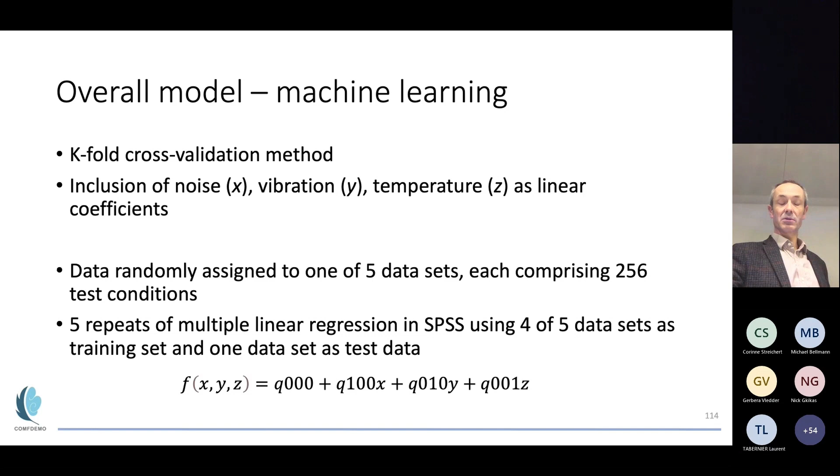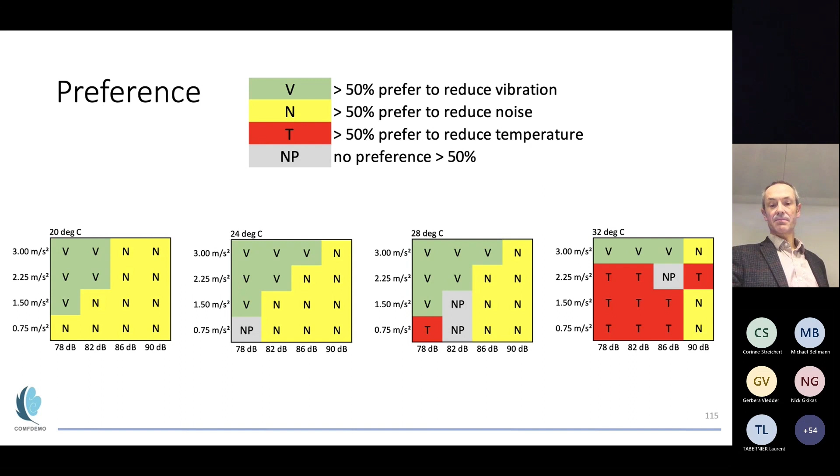What this gives us is parameters which predict what the overall comfort, or rather overall discomfort, is. I showed you this previously, and the other thing we brought into this model is predicting the percentage of people who would like to reduce vibration, noise, and temperature within a numerical model. So we end up with a second model based on machine learning and temperature, which gives us a prediction of the overall discomfort.

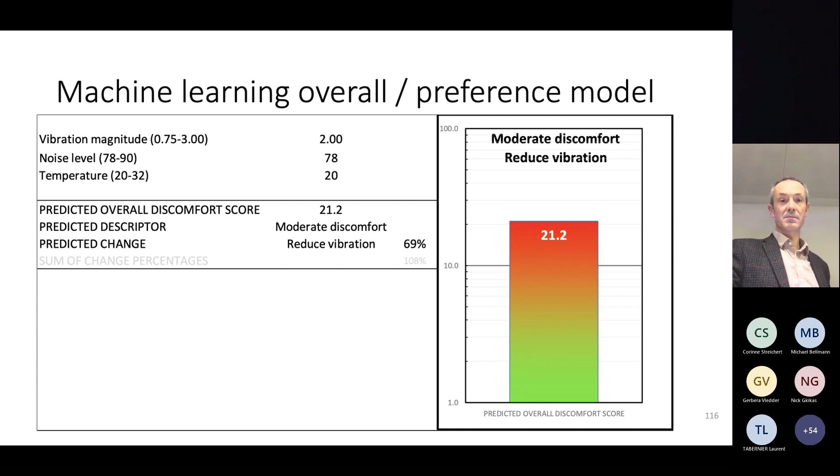That's where we've got to with our modeling.